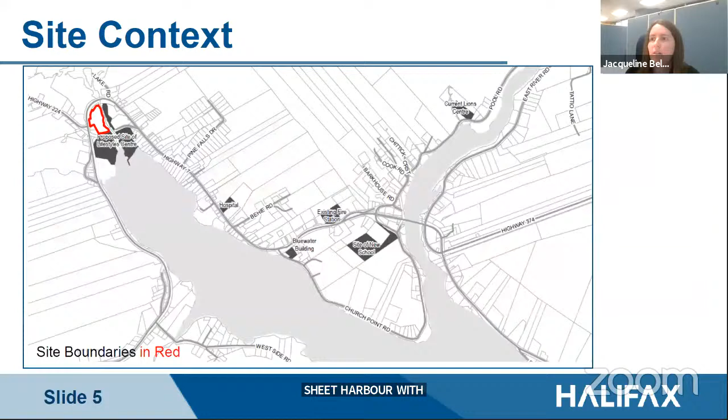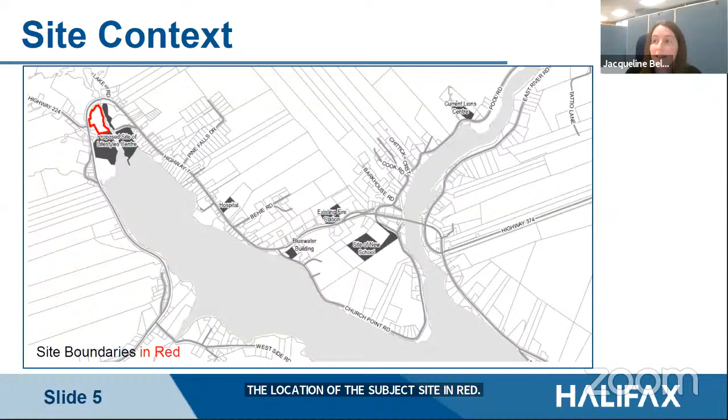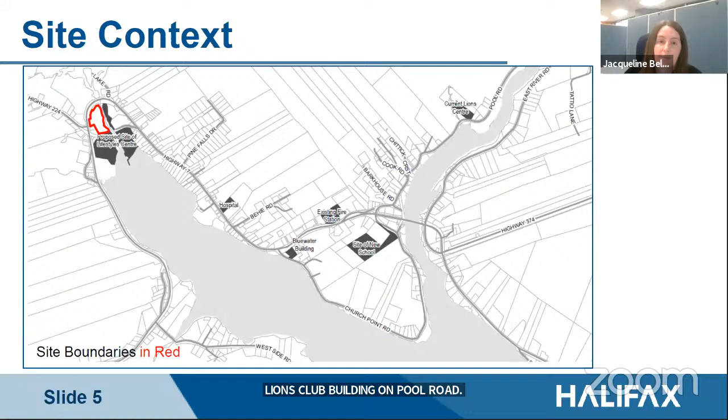This slide shows another map of Sheet Harbour intended to give a sense of where the existing public facilities are located in relation to the subject site. From west to east: the subject site in red, the Eastern Shore Memorial Hospital, the Bluewater Building where the current library and recreation center are located in leased space, existing Fire Station 28, the Marine Drive Academy School, and the Lions Club building on Pool Road, which is the existing facility. For scale, the driving distance between the existing Lions Club and the subject site is about 3.6 kilometers. Slide 6, please.

This slide is to provide an indication of the uses surrounding the subject site, notably a picnic park located to the north between the subject site and Highway 7, the MacPhee House Museum and Elmhurst Apartments to the east opposite the West River Falls, a portion of Elmhurst Drive to the south which connects to the remainder of Elmhurst Drive via a pedestrian bridge. To the north and south of this portion of Elmhurst Drive, you can see two single unit dwellings tucked away there to the east of Highway 7. There's also provincial land to the south, some of which is subject to a purchase and sale agreement, however not the southernmost part, which is the location of a reported historic burial site. This will remain in the ownership of the province, as well as the St. Peter's Church to the southwest of the site opposite Highway 7.

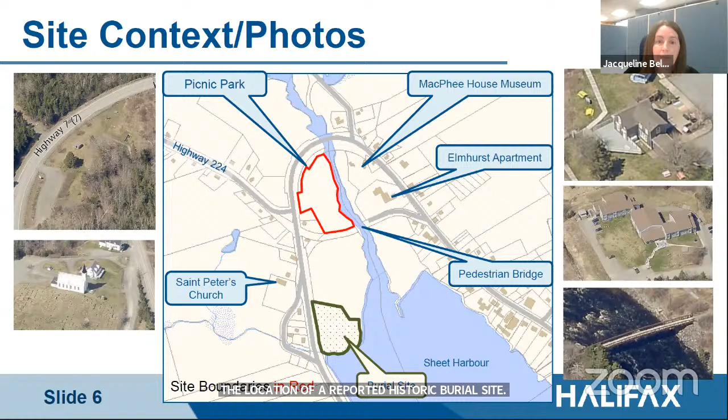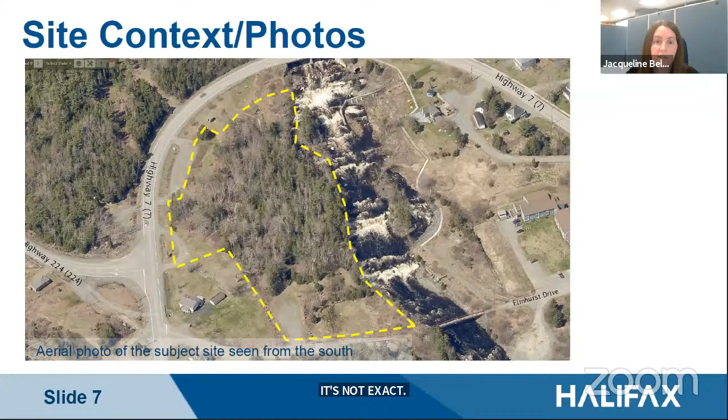This slide is an aerial photo of the subject site taken from the south. I've tried to project the property line boundary onto this photo in yellow. It's not exact—it's meant to be very approximate for general illustrative purposes for this presentation only. On the next two slides, I'll show some views of the property from street level with this photo as a reference.

Photo 1 is a view of the site from Highway 7 taken from the north. This provides a view of the northern portion of the picnic park, and you can get a sense of how the land slopes towards the West River Falls. Photo 2 is a view of the site from Highway 224 looking across Highway 7, and in this photo you can see an informal turnaround spot.

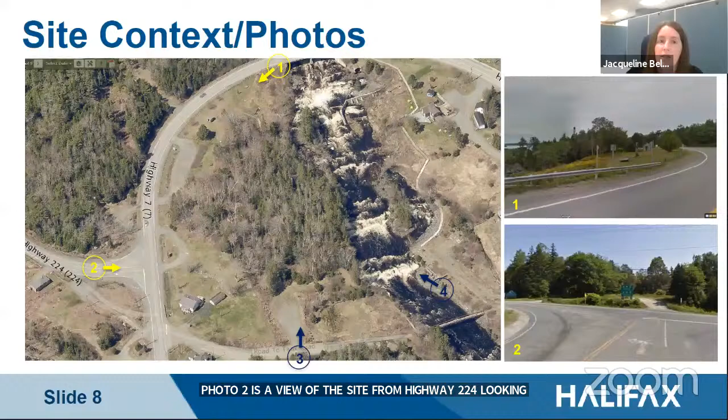Photo 3 was taken from the western portion of Elmhurst Drive—I'll note that Google Maps seems to call this portion of the road Tank Road, but that is not the official name. Photo 4 shows the view of the property from opposite the West River Falls.

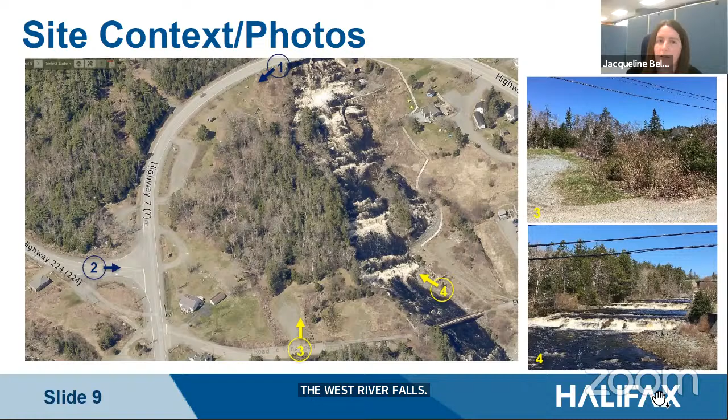To provide an overview of the planning policy applicable for this application, the site is zoned Regional Park, abbreviated RPK, under the Eastern Shore East Land Use Bylaw. It's designated Rural Resource under the Regional Municipal Planning Strategy and Village under the Eastern Shore East Municipal Planning Strategy. Because the regional park zone stems from regional plan policy, it's policy E4 of the regional plan which enables consideration of changes to the regional park zone. But it's policy IM10 of the Eastern Shore East Municipal Planning Strategy which holds the criteria under which staff evaluate the proposed land use bylaw amendment.

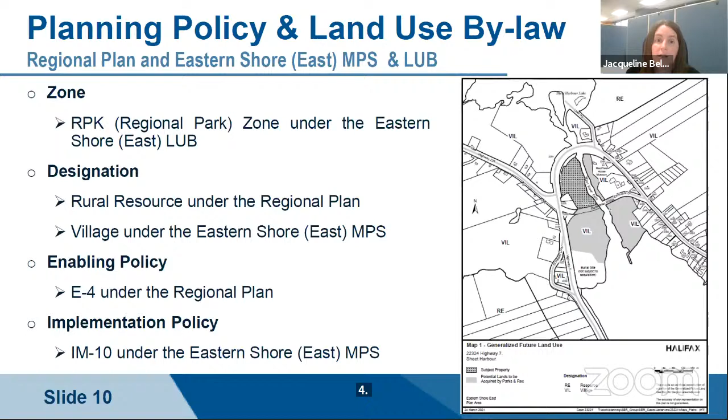On this slide you'll see an excerpt from the regional plan of policy E4. Essentially, the RPK zone is intended to apply to all lands intended for parkland that is regional in nature, regardless of which level of government is the landowner. The zone can differ slightly from plan area to plan area—this is built into policy E4 by how the policy is worded. You'll note the emphasized section says the zone shall permit recreation uses, park uses, and other uses as provided by the existing secondary planning strategies. In the case of the Eastern Shore East Municipal Planning Strategy, institutional uses are enabled broadly across the plan area as of right, and specifically within the village designation where it is intended that commercial and community uses be located.

To speak briefly to the regional park zone, as you can see from the excerpt on the slide, there are some elements of the proposed community facility that would be included in the property as of right, such as a recreation center, but not other elements such as the library or fire station. This is the reason why the land use bylaw amendment application is necessary.

This is the definition of institutional use, which is the use proposed to be included in the regional park zone. As you can see, it's a suite of uses that are primarily government owned and operated, and it has all of the elements that would be included within the proposed facility.

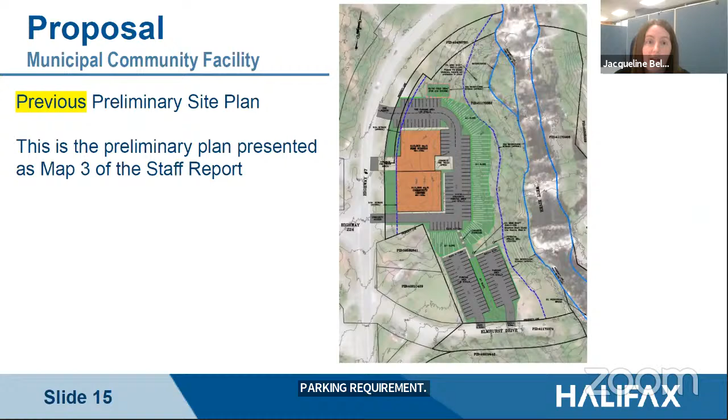This slide shows the preliminary concept plan used for public engagement and included in the staff report as map 3. This plan shows lower parking areas that would be needed to meet the current parking requirement. The next slide shows the current preliminary plan, which reflects the proposed amendments to reduce the parking, and we'll show you the text of that amendment in a few slides.

So slide 16 shows the current preliminary plan. As you can see, one of the primary differences here is the elimination of those lower parking areas. The site plan at this point is pretty straightforward.

The building is illustrated in orange, the northern portion being the fire station and the southern portion being the community center and library. It shows the driveways coming in from Highway 7, the primary driveway being aligned with the Highway 7, Highway 224 intersection. It shows the parking areas around the building, and it shows the required watercourse buffer applied to the West River Falls. I would caution that this site plan is intended to be very conceptual, and it will likely continue to evolve as detailed work on the project continues.

With the land use bylaw amendment process, rather than what you would see with the development agreement process, the site plan can change following council's approval, provided all the requirements of the land use bylaw are met. So you can think of this site plan as more of a proof of concept that the facility could feasibly be located on the site in accordance with the land use bylaw.

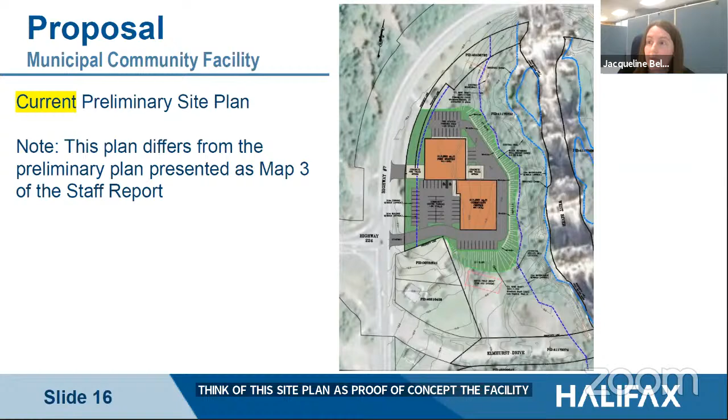As you can gather, as planning staff was reviewing this application, it was felt that the current parking requirement was excessive for this proposal. So we consulted internally to determine what requirements would be appropriate to satisfy our municipal needs. The proposed parking requirement amendment, as shown on the slide, would yield a total of 70 regular parking spaces. I'll note that this is a minimum requirement, so if operationally more spaces are needed in the future, they could be added as of right.

Also, the way the amendment is written, it doesn't affect the parking provisions that would be applicable to other institutional uses, such as churches or daycare facilities. So there's really not much risk that this amendment has any broader implications.

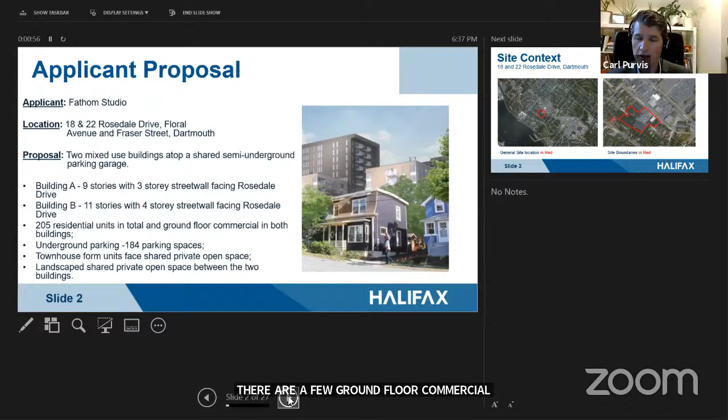On the left-hand side of the screen, you'll see the general location of the site. You can see the bridge run up just in the bottom towards the right of the screen in that site, and Wyse Road just above that circle on the left.

On the right-hand side, more specifically, the site itself, having frontage on Rosedale, as well as Floral, as well as Fraser, and backing onto properties that front onto Hester to the south.

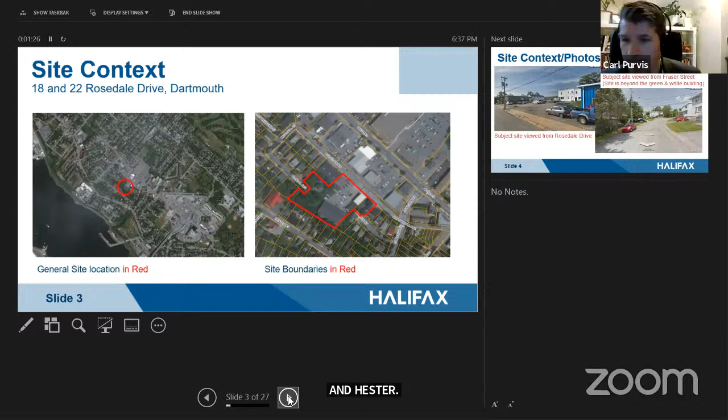Some context pictures that Daryl's provided here. This is the subject site, as can be seen from Rosedale on the left-hand side of the screen. And then the subject site from Fraser Street on the right-hand side. It's just beyond that green and white building, dead ahead of the arrows in the middle of the screen.

In terms of the policy and zoning applied to this site, this is zoned as higher order residential within our relatively new regional center land use bylaw, and designated as higher order residential in that regional center municipal planning strategy, package A. The existing uses include a little bit of commercial, a little bit of industrial, a little bit of residential, so a little bit of everything happening on the site presently.

Notwithstanding that it's zoned and designated within the center plan, the enabling policies for this application are IP1C and IP5 of the Dartmouth Municipal Planning Strategy, and I'll explain a little bit about why that is the case in just a moment.

This application was here a few times before in front of Harbour East Marine Drive Community Council, first on November 12th in 2020. At that point, staff outlined the proposal within a draft agreement and a report, largely the same building, with 9 and 11-story towers on a shared podium.

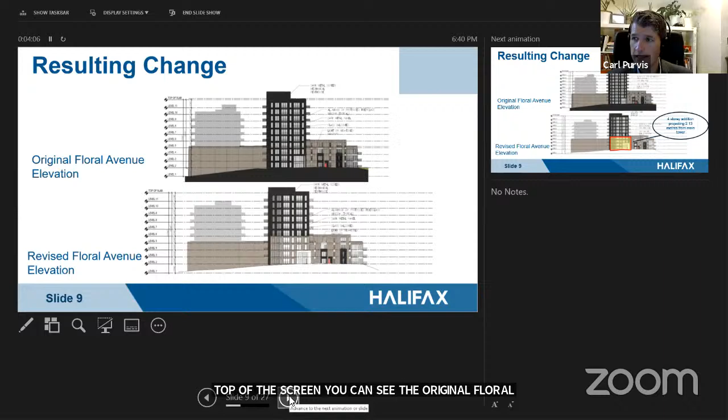The result of that was a change made by the applicant. On the top of this screen, you can see the original Floral Avenue elevation. At the bottom of the screen, you can see the revision that the architect and the developer proposed and provided. For this component of the building, they provided an additional 4-story portion that projected about 2.13 meters from the main tower.

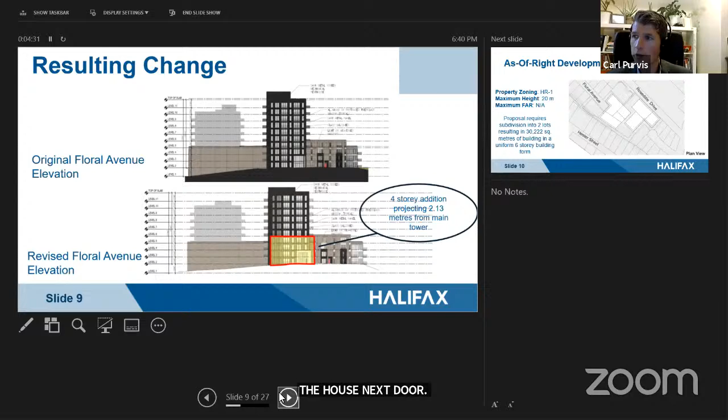The intent of that projection is to provide a little bit more transition to the adjacent low density use, the house next door. So in essence, it's providing a type of street wall, if you will, and a little bit more of a human scale, or a similar scale to the building components next door.

To address council's other question, in terms of the as-of-right development option, these were shown to council in the supplementary report provided. Staff developed two possible as-of-right development options that could happen under the existing center plan that the property is currently zoned as.

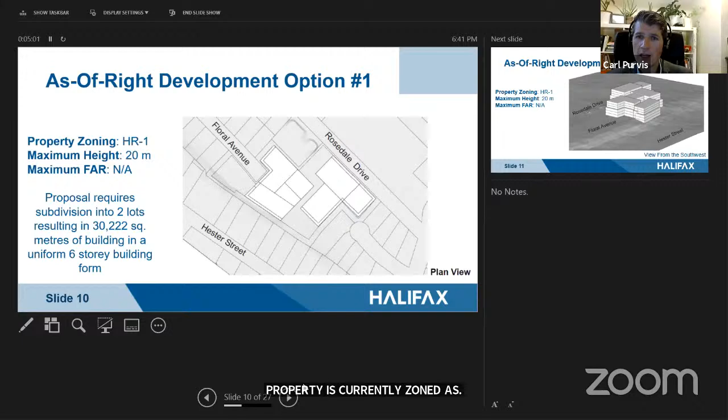Under this HR zoning, there's a maximum height of 20 meters. Floor area ratio doesn't apply in this particular site, but in this particular proposal, you could divide the site into 2 separate lots and ultimately build within 2 separate buildings, an amount of development netting just over 30,000 square meters of building in a 6-story form, given that 20-meter height limit.

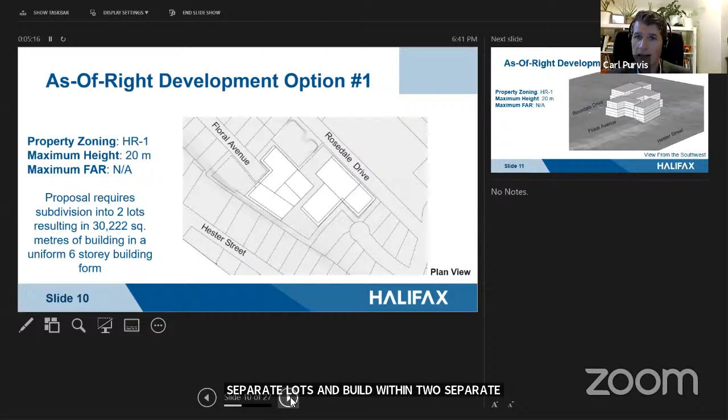So here's a perspective of the first option in the 2 different buildings on 2 different sites. This one is viewed from the southwest, with the harbor behind us, looking towards the northeast. This second view is looking more towards the harbor, so the view from the northeast looking towards the southwest, showing those two 6-story forms.

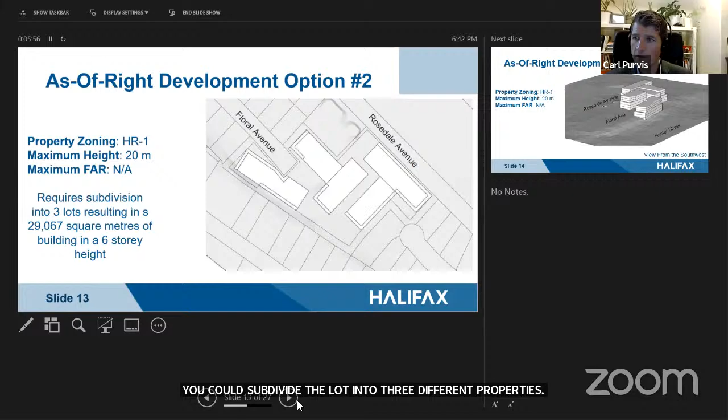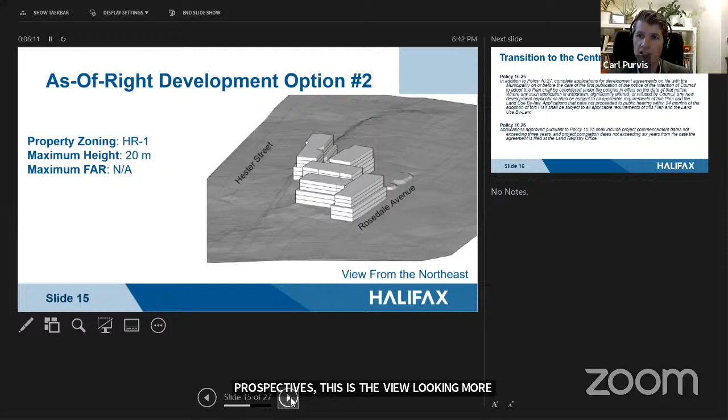A second option was also developed. Given the amount of frontage this particular site had, you could subdivide the lot into 3 different properties, resulting in 3 separate buildings netting just over 29,000 square meters of building, also in that 6-story form, given the 20-meter height limit. From the same perspectives, this is the view from the southwest looking towards the city from the harbor, and again those three buildings looking from the northeast towards the southwest and the harbor.

I mentioned that the center plan zoning and designation did apply in this case, but the enabling policies were under the old Dartmouth plan. Why is that? There's a policy within the center plan that allowed projects to transition gradually in. In essence, if an application came in before notice of intent to approve the center plan took effect, we would honor that and let it continue through the process, so long as it finishes within 24 months of the plan's adoption. That magical date is coming up in 2 weeks' time - September 17th, 2021 - the last day an application could be considered under the old policy.

At this point in the process, we've deemed the application complete, done the review, had some public engagement, written the staff report, and received notice of motion from Harbour East Marine Drive Community Council, and here we are at the public hearing. If council were to approve this development agreement, we'd enter a 14-day appeal period where any affected residents or the applicant could appeal the decision. Assuming things were still on the go at that point, the applicant could then apply for development and construction permits.

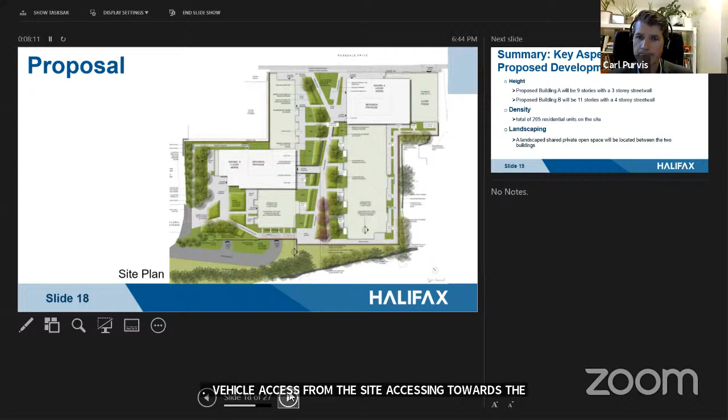So again, a summary of this development: building A, towards the top right of that previous drawing, is 9 stories with a 3-story street wall, growing up towards building B, which would be 11 stories with a 4-story street wall. There are 205 residential units total, and a significant amount of landscaping both on top of podiums and around the site, primarily a shared private open space between the two buildings in the form of a courtyard.

As previously mentioned, policy 10.25 of the regional center plan allowed the application to be considered under the Dartmouth policies, primarily IP1 and IP5. Those policies require council to consider height, scale, massing, materials, traffic, site access, landscaping, as well as open space and amenity areas among the things it needs to consider in making a decision on this development agreement.

So the issue staff held, and the reason for the recommendation of refusal in the original as well as the supplementary report, was policy IP1C2. It says that in considering zoning amendments and contract zoning, which is development agreements, council shall have regard that the proposal is compatible and consistent with adjacent uses and the existing development form in the area in terms of use and bulk and scale.

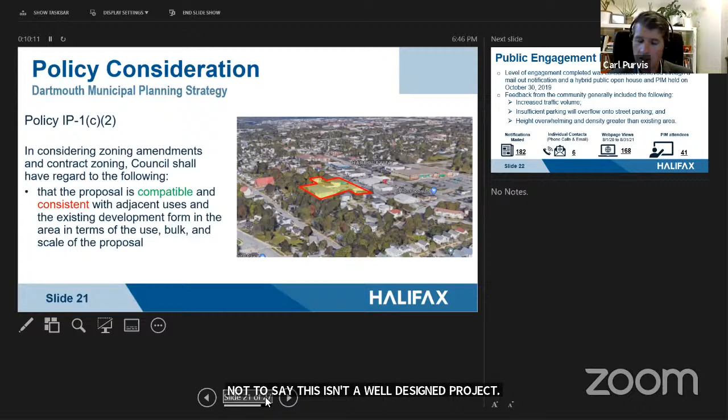So compatibility is certainly a reasonable test within planning circles. Consistency is a much higher bar - in essence, it means largely that anything new should be the same or similar to the development happening surrounding it. That's where staff couldn't get there. It's not to say this is not the right spot for redevelopment, or that this isn't a well-designed project, but in terms of the proposal being compatible and consistent with the surrounding community, that resulted in the staff recommendation for refusal.

Public engagement did take place in this application. We did some consultation through a mail-out notification and a hybrid public open house in PIM held on October 30th, 2019. Lots of feedback from the community in terms of concerns about the increased traffic volume, concerns about the amount of parking proposed on the actual site itself, and as well as the height, density, and mass of the building in comparison to the existing surrounding context.

There are also a number of non-substantive amendments that could be made in this particular development agreement. Non-substantives are amendments that would have to be ultimately approved by community council, but could be done without the need for a public hearing.

So there could be modest changes limited to a certain percentage to the maximum number of dwelling units permitted, a reduction in the common amenity space or the rooftop amenity space, changes to the parking numbers, changes to some of the architectural requirements, and changes to the below grade and above grade setbacks to buildings A and B.

Council, I would note that these non-substantive amendments are a little bit more liberal than you're typically used to seeing. The reason is that, if this development agreement were to be approved, when the policy disappears, there'd no longer be an ability to make a substantive amendment. So the non-substantive amendments are a little bit more numerous here, just to give the applicant a little more flexibility, and frankly, council a little more flexibility in making their decisions.

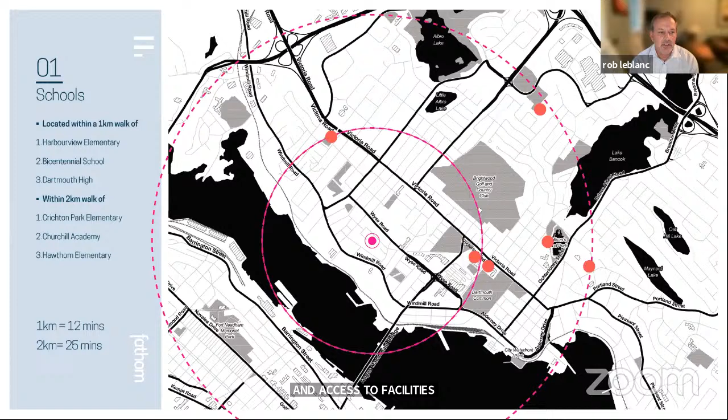We'll use that to talk about the walkable nature of this site and access to facilities. Within a 1 kilometer walk we have easy access to 3 schools, and within 2 kilometers we have access to 3 schools.

Shopping along Wyse Road, within that 1 kilometer radius, includes Victoria Road, Windmill Road businesses, and the growing corridor of Wyse Road including the Dartmouth Shopping Center. Moving a bit further out takes in shopping at Highfield Park, downtown Dartmouth, and even downtown Halifax if you consider taking the ferry. Micmac Mall is just outside that 25-minute walk radius.

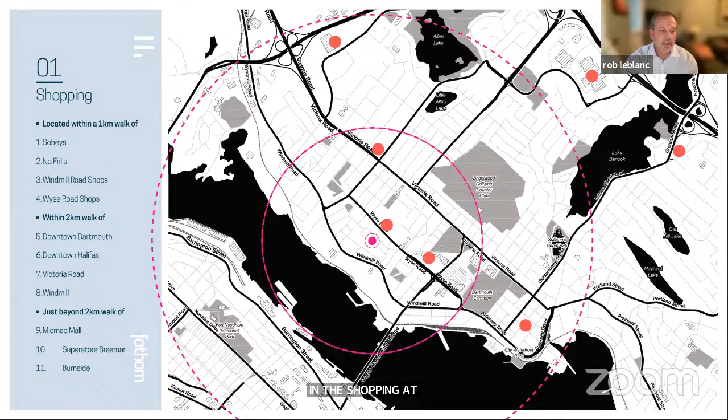In terms of recreation opportunities, these are just some of them. There are all kinds of recreational opportunities within easy walking distance, including many sports fields around the area, Dartmouth Common, Brightwood Golf Course, Maybank Fields, and Dartmouth Waterfront Trails and Lake Banook Trails. It's an exciting spot in the center of recreation.

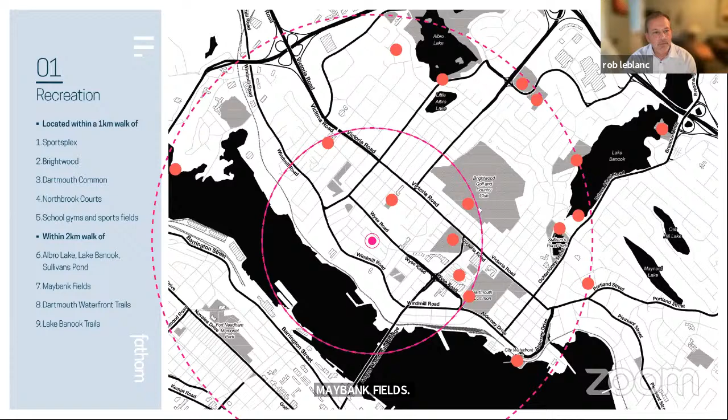Within an easy walk for transit, we're within that 1 kilometer walk of the Dartmouth Transit Hub, which has about 20 routes with access all over HRM. Outside of that, within 2 kilometers, we're very close to the Dartmouth Ferry Terminal, Alderney Gate Hub with 9 routes, and the Highfield Terminal with 7 routes. Just outside is the Micmac Transit Hub.

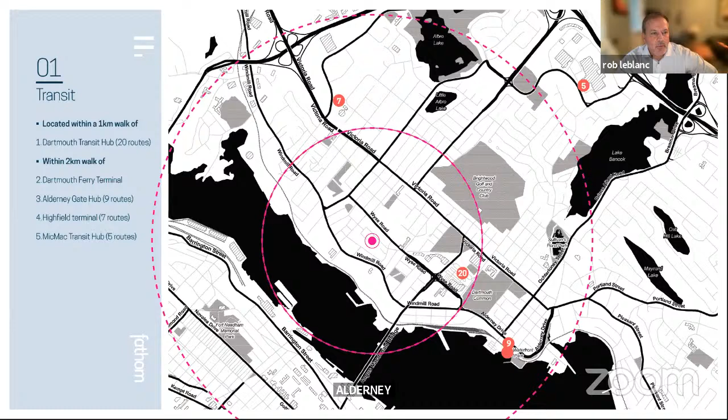As Carl mentioned regarding existing site context, I worked on a plan for Wyse Road in 1991 looking at how to transition from used car lots and these industrial type uses to a residential community. Rosedale, as it currently sits, is kind of a remnant industrial area backing off of what used to be a lot of used car lots in the rear, and it's quite an industrial and office intensive use that backs directly onto residential neighborhoods. One other note is the proximity of Sobeys, just one block away through the through-block of Rosedale.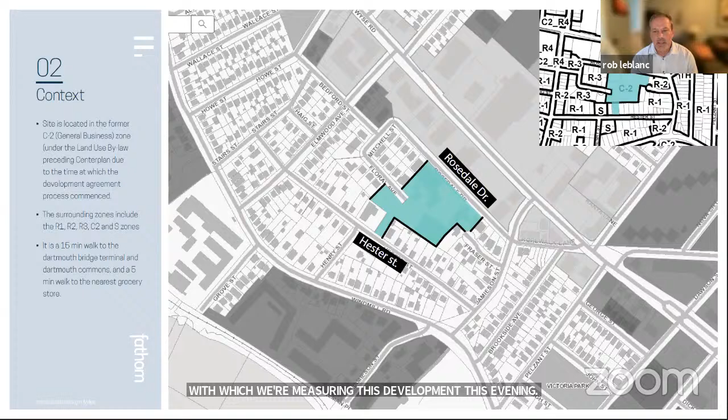Carl has already gone through the planning context with which we're measuring this development this evening, and we've used those planning guidelines to help guide the design and layout of this development. Looking forward, under the current planning regime, the HR-1, as Carl mentioned, allows a 20-meter or 6-story development just 6 meters or 20 feet off of the rear property lines.

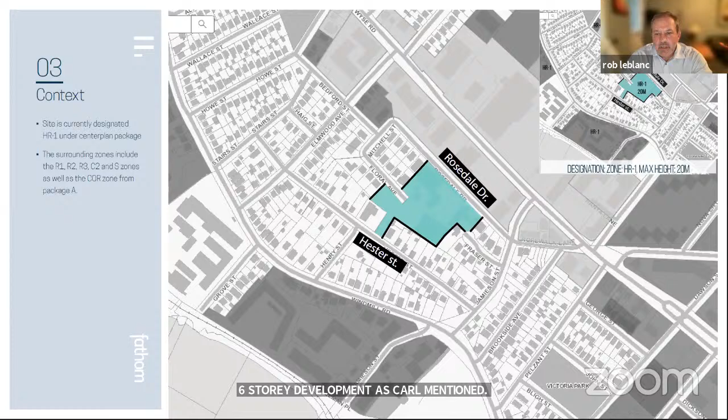What Chris is going to present tonight is the alternative of, rather than sprawling buildings at 6 stories across the entirety of this site, we've chosen to keep pushback from property lines. We've chosen to keep a central landscape courtyard and put that density in some towers placed very close to Rosedale, away from residential areas. So it's just the difference of two different approaches.

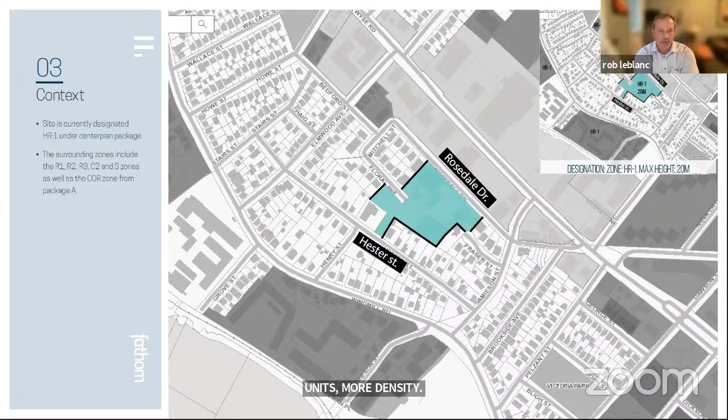As Carl also mentioned, under the center plan we've done an analysis too where we can actually get more units, more density, but we're doing that at the expense of sprawling much closer to residential buildings, which we'll show in some of the next drawings. Just letting you know, I'll give you 6 minutes of your 10-minute presentation.

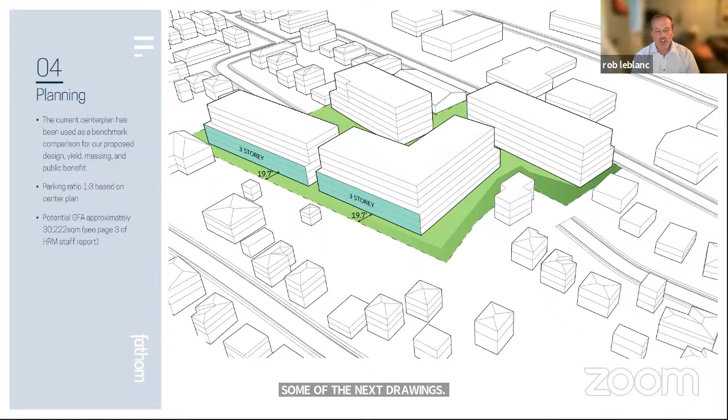Okay, we're going to pass this on. Just these diagrams show this. Here's what's possible under the center plan, and here's what we're proposing with 29-foot and 78-foot setbacks from the Hester Street properties, preserving the tree buffers and the setbacks. I can speak to stormwater management in questions.

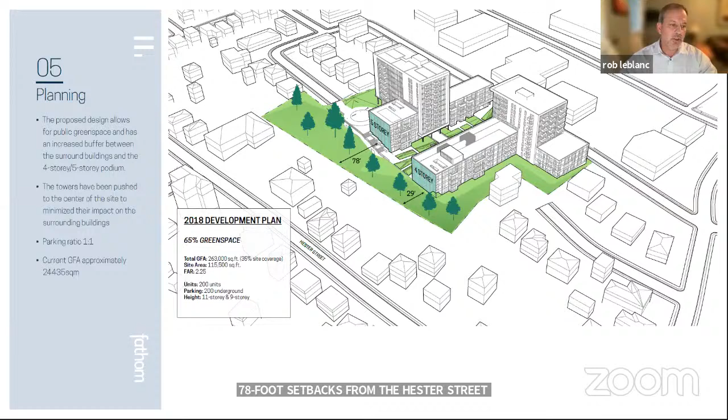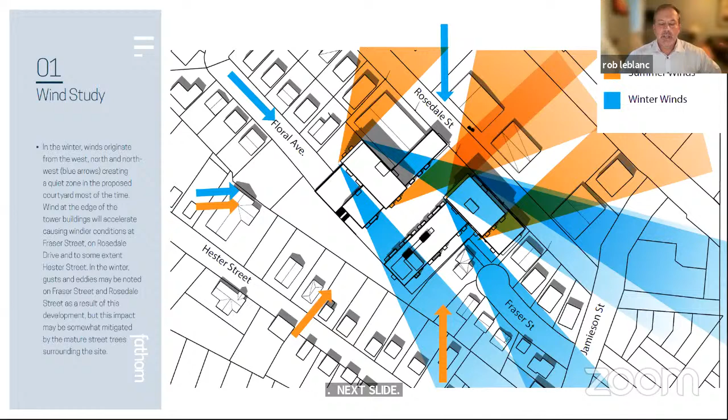We're going to pass through some of this since we're out of time, but if we want to come back to wind implications and solar implications, we can certainly do that. I think that passes it on to Chris, and Chris is up.

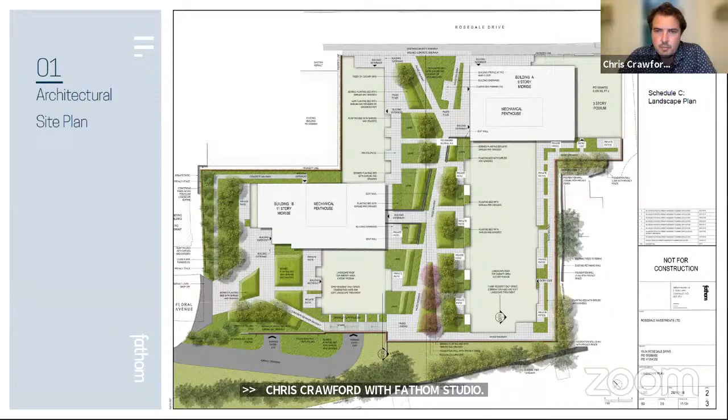I think this site plan really captures the essence of this project. It's important to note that this DA will lock this project into this level of green space. On one of the previous slides, 65% of the site was maintained as green space. It's a very unique approach, and that's the great thing about development agreements with a very unusual site configuration.

We're occupying very little of the site, by carefully placing a bit of density in two of these mid-rise forms with 9 and 11 stories, pushing the development away from the property boundaries as much as possible. Next slide.

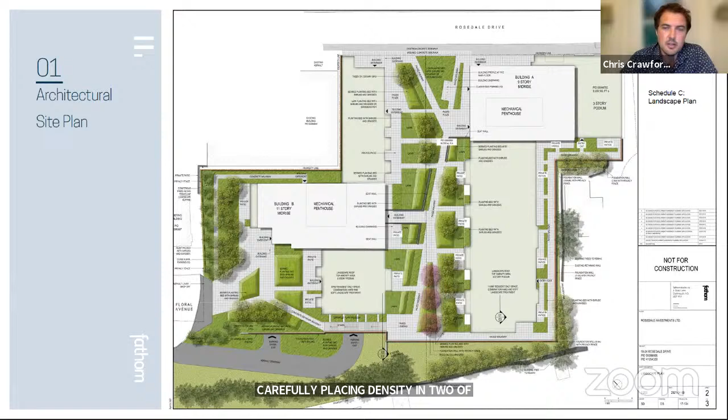I won't get into the yield. As Carl mentioned, we're developing less than we could in the future with the center plan, and would like to continue down that road. So we'll go to the next slide.

This is a really important site section, just for context on where we've placed the tower closest to Rosedale Street in relationship to Hester Street. We've certainly been cognizant that Rosedale is getting closer to that corridor zone in the future, and a bit of height there is much different than in the rear yard of the properties on Hester. Within the center plan, we could maintain this 6-story building right up in the backyard. With the tree buffer and transitioning we're doing with the massing, this is a much better solution. Next slide, please.

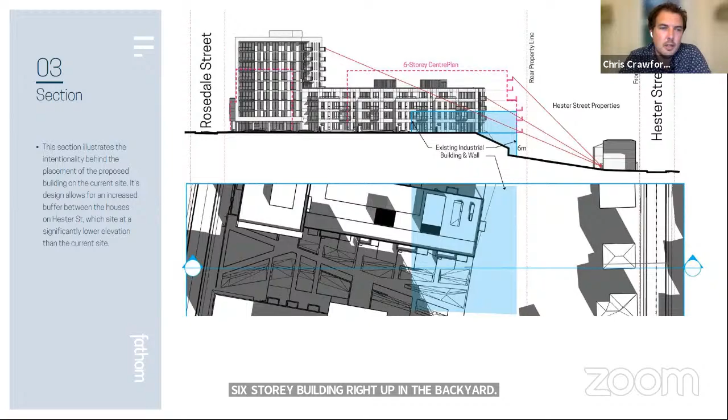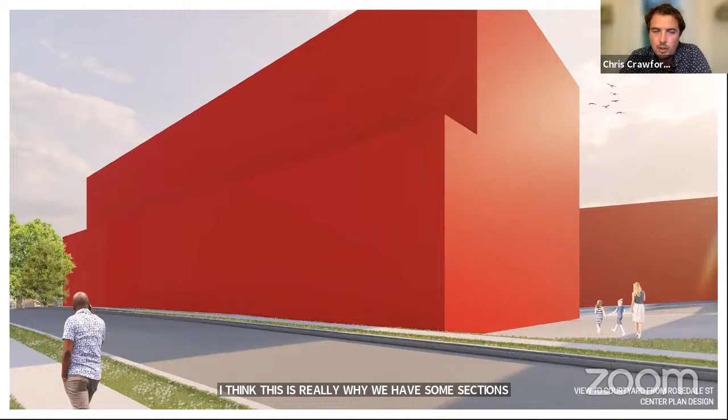Here's just showing a mock-up of the massing of what could be done within center plan. We can fill the entire site with many buildings. We don't need to get into why that's not as good as the previous slide, but there's been a lot of bravery on the developer's part to allow us to do that much green space. Next slide.

This is a view down Floral Avenue. You can't really see the changes we made to the taller section of this, but with the treed-in sections and landscaping and its proximity to Rosedale, I think this will be a really favorable view and still transitions into the neighborhood well. Next slide, please. One minute remaining.

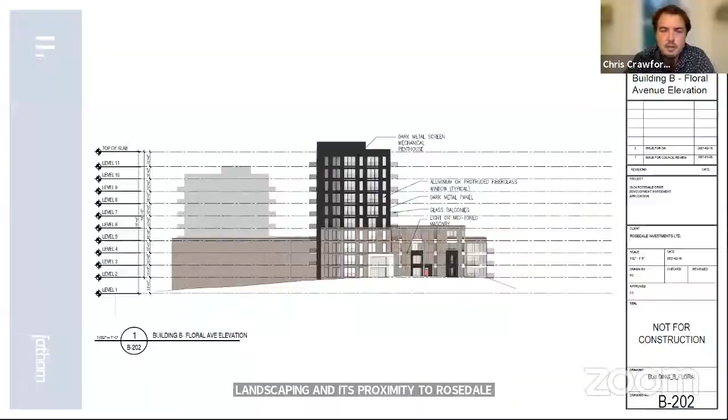Okay, I'll skip through the elevations. Next slide. Next slide.

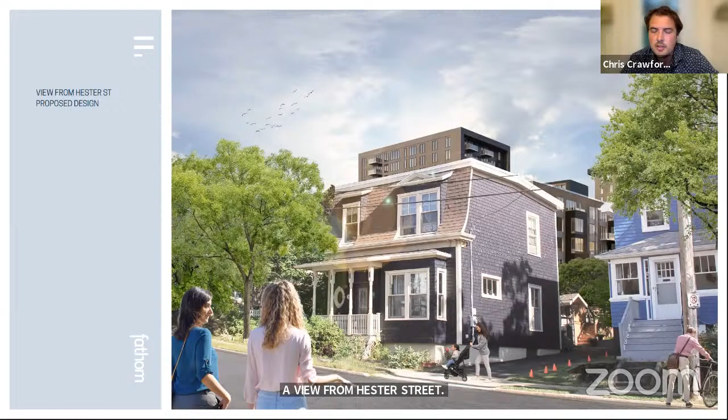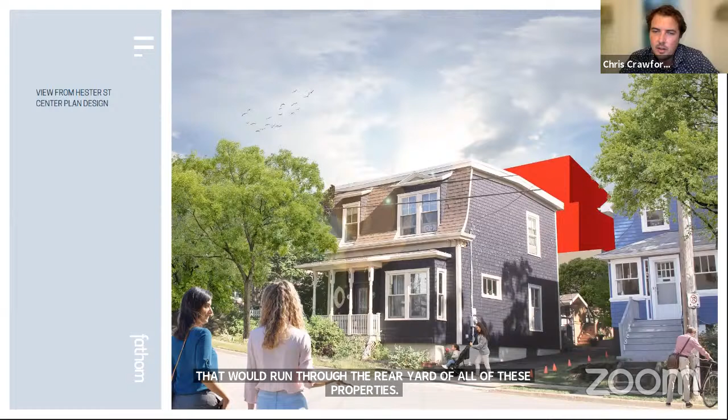Then again, a view from Hester Street. You can see the building closer to Floral Avenue is just kind of poking above the residences here. But if you go to the next slide, this would be that 6-story massing that would run through the rear yards of all of these properties. While we've condensed a small area to be a little bit taller, we really feel this would mean a lot of eyes on those backyards, and that our solution is substantially better. Next slide.

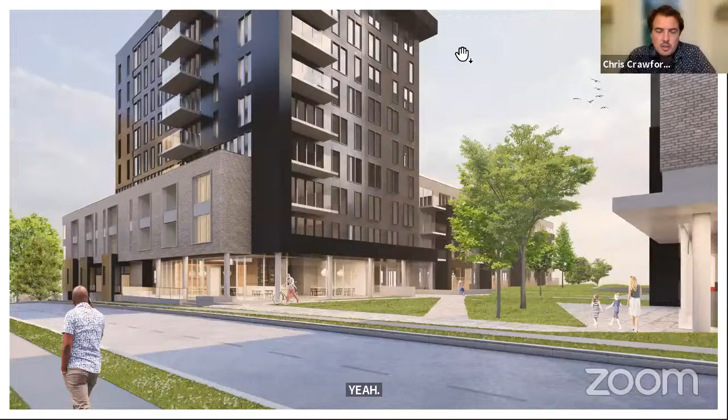Yeah, I think that's it. I'm happy to answer some questions and chat further on the strategy we have here. But we've got a nice active streetscape, walk-up units on almost all faces of this building, extensive landscaping, and we're really excited at the opportunity that this could happen in our neighborhood. One point of clarification for Becky: we do have 2 parking garage entrances, one on Rosedale and one on Floral. So if you want to ask questions about that, we can answer those.

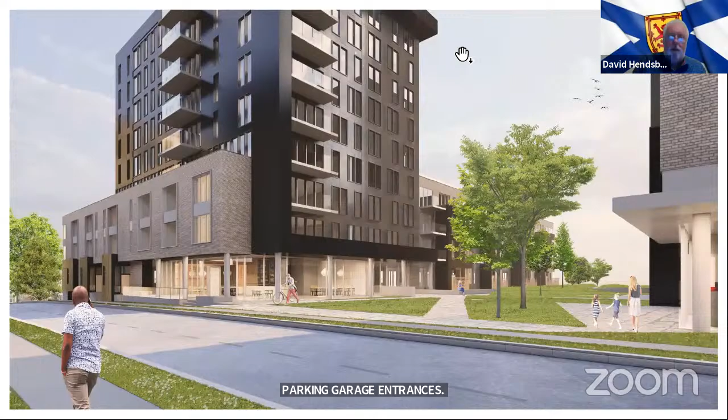Thank you, Mr. Chair, and thank you to Fathom for the presentation. I do have 3 questions of clarification. The first is the tree line on the back along Hester. Could you expand on what I asked Carl earlier? What is the intent along that property line in terms of tree retention? If we get to go forward with the DA, we get to keep those trees. Those trees will soak up anywhere between 150 and 300 gallons per tree of stormwater.

So they're an important part of the stormwater strategy, and it would be our intent to keep them. So you're not planning to cut some of them. The plan is to keep all of them. We may have to trim, and we have to get an arborist in because we may be into cutting roots. That means we have to cut some of the canopy so the tree doesn't die, to give the best chance for the tree to survive.

So affordable housing is something that's come up a couple of times. We all know it's not something the municipality can compel. I'm wondering if some developers in town have accessed the CMHC program, and if there's any move in this project to include affordable housing. Yep, I spoke to Joe before this, and the commitment is still there. Depending on what program he's able to access, it's between 5 and 10% of the units that would be affordable.

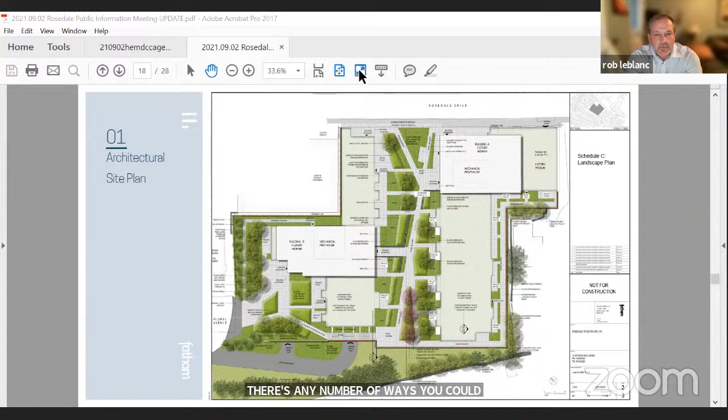Sure, yep. So as that's coming up, staff looked at two different options, and there's a number of ways to carve this cake. If we pulled the floral cul-de-sac in slightly, you could potentially get a fourth building in there with the frontage requirements you'd need for that. So there's any number of ways you could do that. The main requirement under center plan is no building dimension over 64 meters, a 6-meter setback from all adjacent property lines, and a step back at the fourth story of 2.5 meters, I believe.

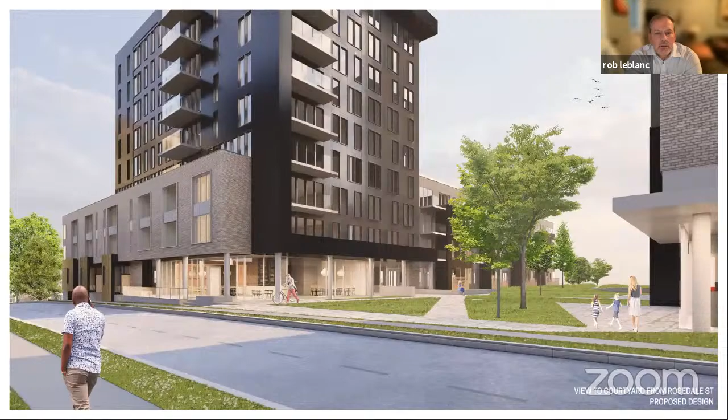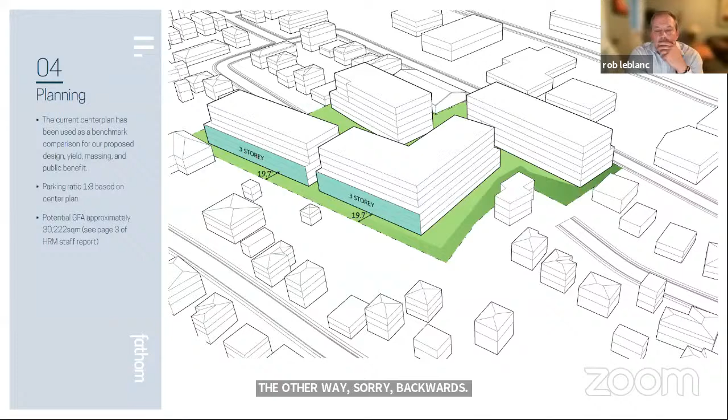Just keep going back two from here, I think. It's 12 and 13 if you're looking for a number. Yeah, just keep going. No, the other way, sorry, backwards. Page 12, yeah, that's there, the one, one more, there you go. Keep going, yeah, can we go to that one again? The next one. Yep, these two, can we go one back? Just one back, there we go.

So this is one of the potential options you could build under center plan. Yeah, that's right. And could we flip to the next one? Yep.

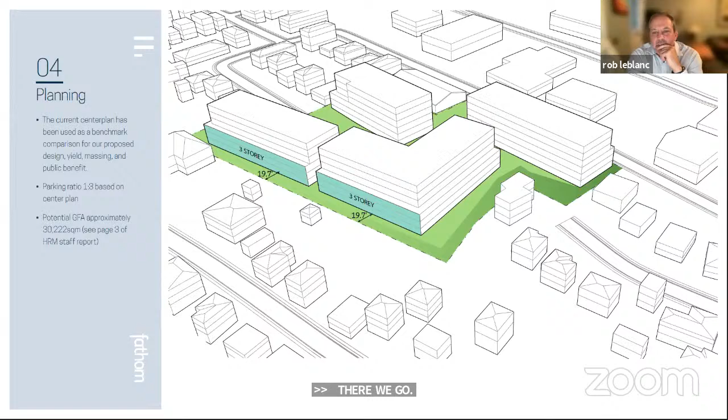So you see the difference here. We've got a four-story backing onto Hester Street, and the density has been pushed. So rather than going six stories right in these people's backyards, we've pushed off quite a bit more than we would have had to under center plan.

So it looks, if I'm reading this correctly, I would have liked to have seen these beforehand, because they're better than those cross sections in the staff report. So where you're closest to the backyards on Hester, that's 29 feet, it looks like, and the other one is 19 feet. Is it 6 meters? Yeah. So then throughout that gets wider. On Fraser, it doesn't look like there's as much of a difference, just because of the nature of that house on Fraser being right on the line.

Yes, that's right, we're a little more than 20 feet on Fraser. The podium is 20, and we're pushed back just slightly from that. On Fraser, if this were to go ahead, they will also have a retaining wall along that line. The retaining wall is probably closer to Rosedale at the top, we're kind of at grade, but the retaining wall starts to drop depending on how much of the existing retaining wall remains.

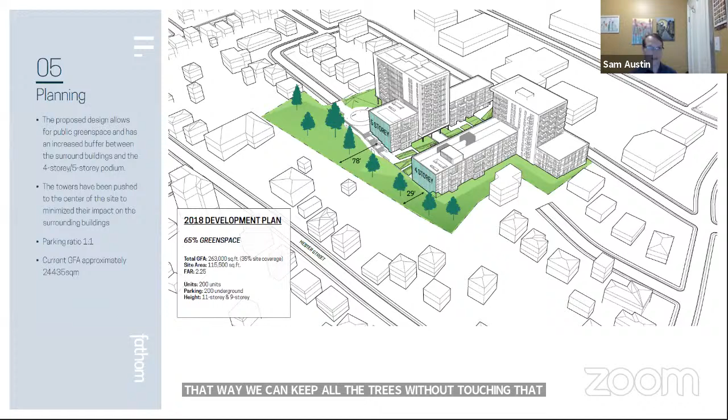Okay, thank you for the clarification. And if Joe could, at the end, remember to comment on the affordable housing piece, because it's certainly one that's come up. Okay, all right. Can you go back two slides? I have a couple questions for you.

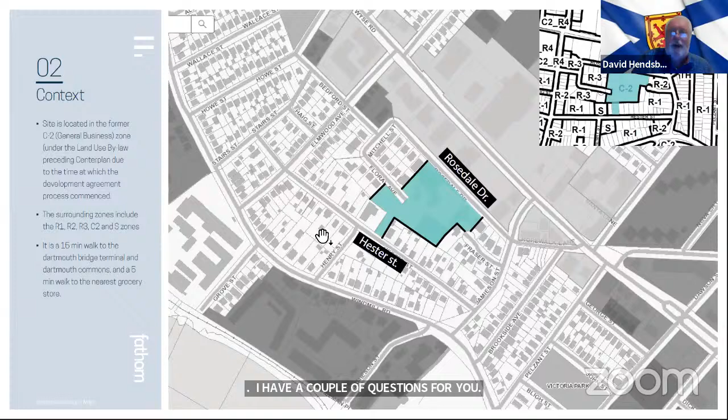One more, okay, right there. I see that there's a right-of-way corridor to Hester Street. If you go back two slides to your proposed alignment or presentation. Yeah, the other way, go the other way.

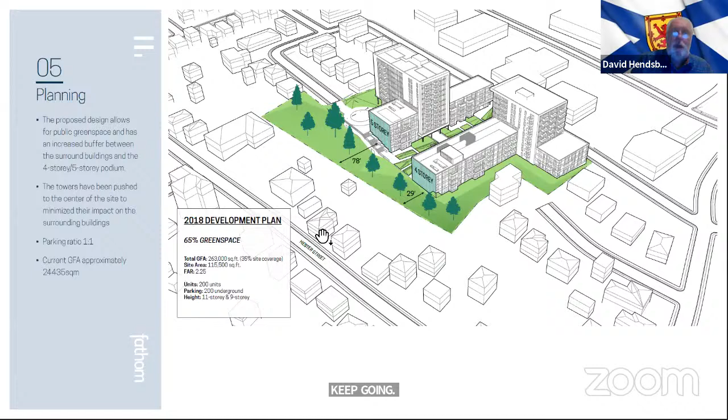Keep going, one more. I see nothing connecting to Hester. So is that going to be a green belt, or a right of way to a path? That green belt you're going to keep there, is that going to become a municipal parkland, or does it stay as green belt parkland for the residents of that property? Or could that become a neighborhood park entrusted and kept by the property owner, or invested with the municipality? I'm curious what happened to that right of way to Hester.

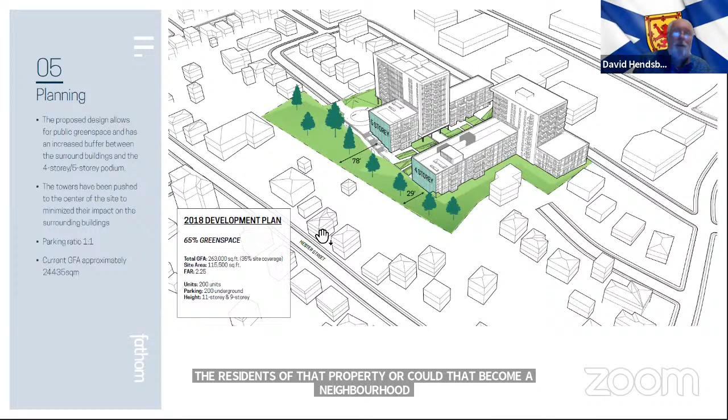So it's still there, but because we can't touch that as part of a development agreement, you're not allowed to do DAs on R1 properties. Its future use would either be to take the water, sewer and stormwater through to Hester, so it just becomes an easement for this development. Or there was some talk at one point of taking the heritage building on this site and putting it on that lot, though we don't know if it could fit. So it has one of two futures: either a future residential R1 lot with an easement through it, or it could be parkland as well.

Maybe Joe can chat about that. Okay, thank you very much.

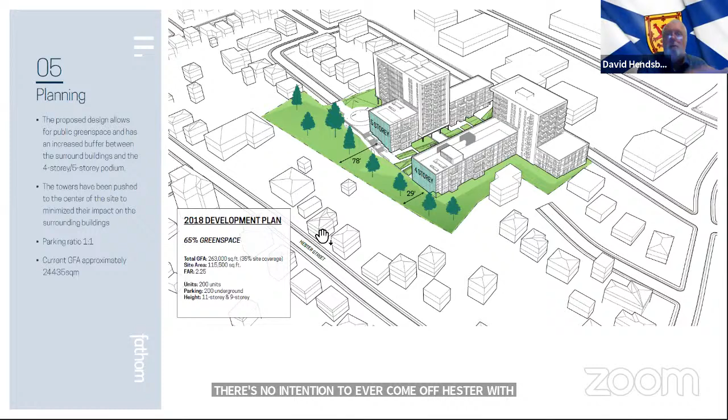But I think Sam also had the question, could you ever put a driveway into this? There's no intention to ever come off Hester with a driveway into this development. But could it become a trailway if you want a greenway connection from Hester up to Fraser? Yep, it could. Okay, that clarifies questions for me.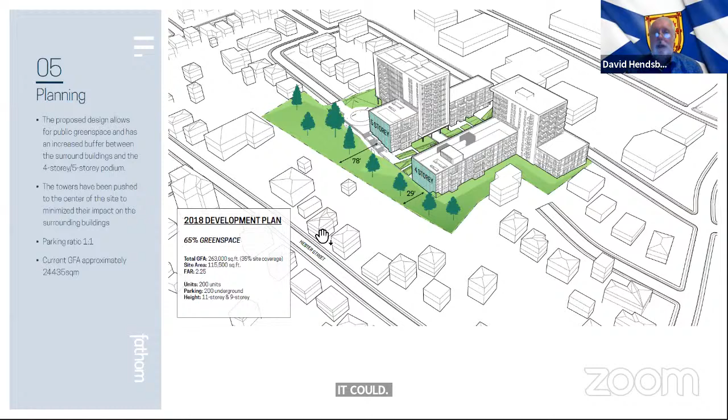Any other further questions from any other member of council before we go to the public hearing? Mr. Chair, I have one. Okay, go ahead, Councillor Kent.

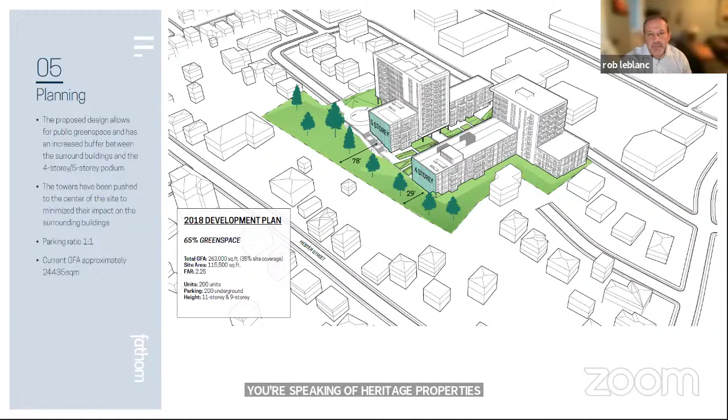I'm just curious, and forgive me if I've missed it, but you're speaking of a heritage property. So if that option doesn't pan out, what's your plan for that heritage property? I think the developer's plan is to relocate it somewhere where we can get it under power lines. And it's not a registered property.

Just to clarify that, thank you. Well, it's just an old building, but not registered. Yeah, it's an old house that would be nice to maintain, to find a second home for.

Okay, any other further questions of members of council before we go to the public hearing? All right, I'd like to open the public hearing now.

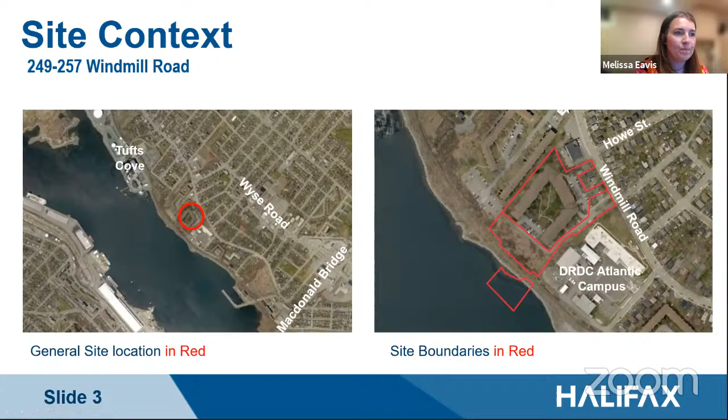So the site context: the map on the left shows the general site location, north of the MacDonald Bridge and just south of Tufts Cove along Windmill Road. On the right, we see the site boundaries shown in red. To the east, southeast, is a federal building, the DRDC Atlantic campus. There's some low density housing across Windmill Road, and a 70-unit apartment building immediately adjacent to the site. This is the existing site, an apartment building, set back from Windmill Road by a couple of parking lots. The development agreement also regulates this two-unit dwelling that also fronts on Windmill Road.

In terms of policy, the site falls mostly within Package A of the Regional Center Secondary Planning Strategy. It's primarily zoned HR1 within the Regional Center Land Use Bylaw, and a small portion towards the Harbour is zoned R4 and C2 within the Dartmouth Land Use Bylaw. In terms of an MPS designation, it's designated higher order residential under the center plan, and again, that small portion towards the Harbour is designated residential under the Dartmouth plan.

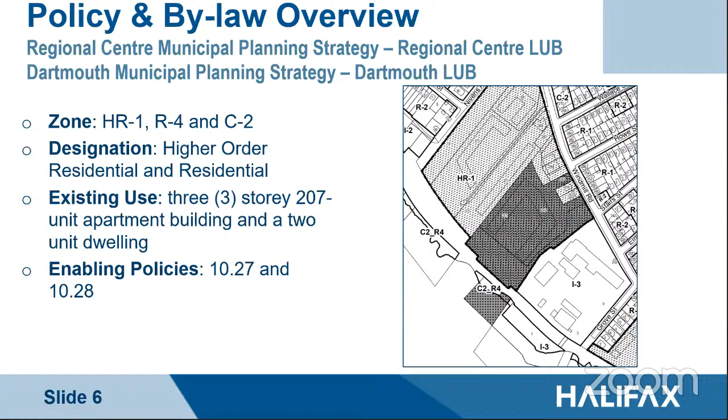So there is an existing 3-story, 207-unit apartment building on this site, and that 2-unit dwelling that I mentioned. Center plan policies 10.27 and 10.28 allow council to consider granting the time extension.

Bit of history on the existing agreement. The development agreement that currently applies to the property was approved in 2009. It allows this 12-story, 103-unit residential building shown here on the right, in addition to the existing uses on the site. The original construction commencement date for the project was January 2015, and a completion date was January 2020. A time extension was requested and granted in 2019, which resulted in a construction commencement date of February 2023 and a completion date of February 2026.

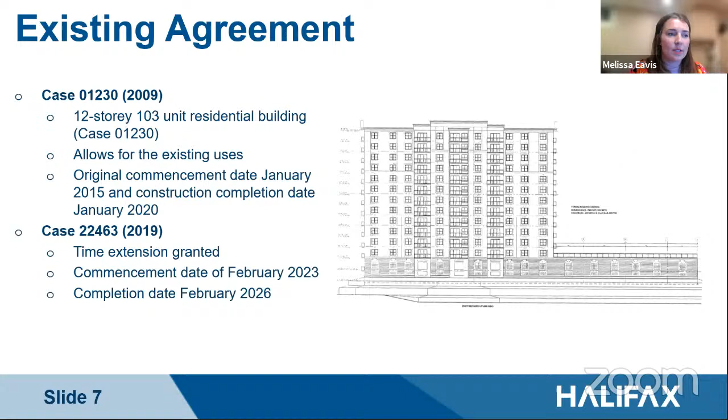Due to labor and supply chain issues caused by the pandemic, the applicant feels the project is unlikely to meet those current commencement and completion dates. And to that end, they're requesting council to extend the commencement date of the development by 1 year and the completion date of the development by 2 years from the date of registration of this agreement.

In terms of public engagement, the level of engagement completed was consultation achieved through providing information on HRM's website and signage posted on the site. I didn't receive any feedback from the community, and the web page we put up got about 272 views.

Staff determined that the request meets the applicable policies, and as such recommend that Community Council approve the proposed amending agreement. Thank you.

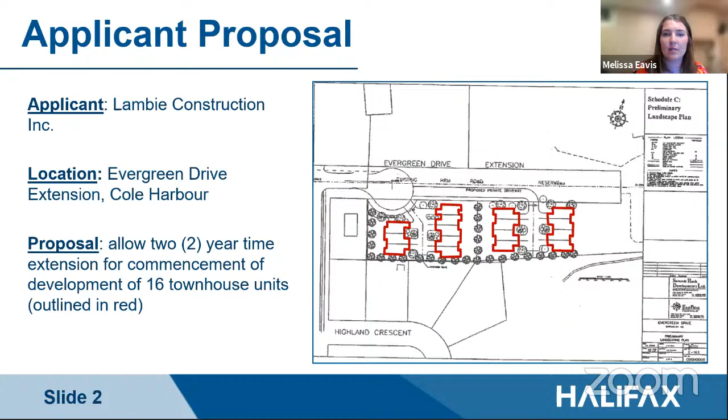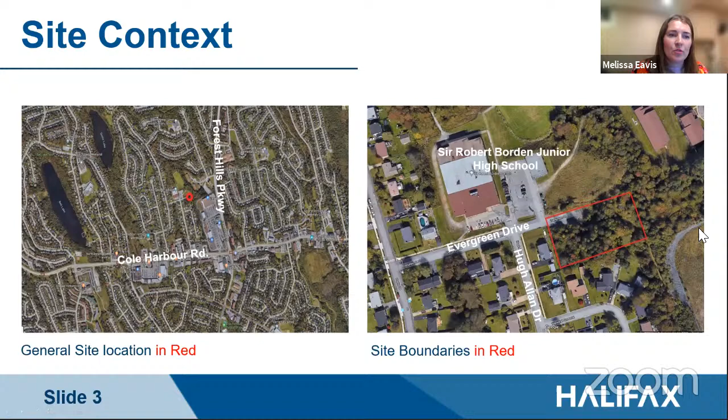The general site location is shown here on the left. The site is north of Cole Harbour Road and west of the Forest Hills Parkway, and you can see the Cole Harbour Shopping Centre located here with the Sobeys and the Canadian Tire. On the right side, we have the site boundary shown in red. The immediate north is the Sir Robert Borden Junior High School, and to the south and west is a low-density residential neighborhood, and to the east off screen here is the Cole Harbour Shopping Centre.

Just some background on this one. The original agreement was approved in 2009 and it allowed 16 townhouse units. Construction was to commence within 5 years, so that would be by March 2014. In 2014, there was another request to extend the commencement date to January 2016, which was approved. Then again in 2017, there was another approval to extend the commencement date to August 2018. In 2020, there was another 1-year extension resulting in a commencement date of April 2021. The completion date was originally set for 20 years, so this has remained constant through the amendments, and that still would be set to March 2029.

In terms of policy, the property is designated urban residential under the Cole Harbour Westphal Municipal Planning Strategy, and the policies used to allow the development agreement are UR8, which allows council to consider townhouse units without direct access to a public street, and IM11, which is used to ensure the proposal is consistent with the intent of the planning strategies. These policies are unchanged and continue to apply to the subject site. Under the land use bylaw, the site is zoned R1, which allows single unit dwellings, home occupation, small daycares, and open space uses.

Under section 6.2 of the existing agreement, the time extension request is considered to be non-substantive and may be approved by a resolution of council without a public hearing. To that end, staff recommend that Harbour East Marine Drive Community Council approve the proposed amending agreement to allow the time extension. Thank you.